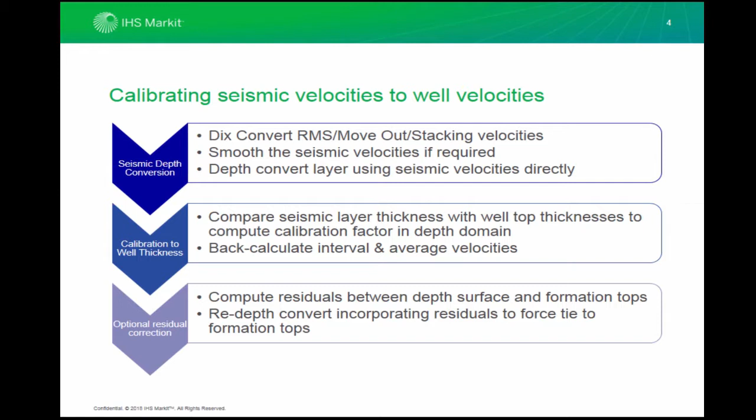So let's have a look at the project we will be using in VelPAK before we go into the wizard. The project already has data selected for the model. We have a time grid here displayed on the surface module for layer 1, and these data are shown in the model tree to the left against each of the events.

If we open up the surface part of the model tree, you can see the time grid stored under event 1. Also within this model tree you can see that we have the 3 wells displayed.

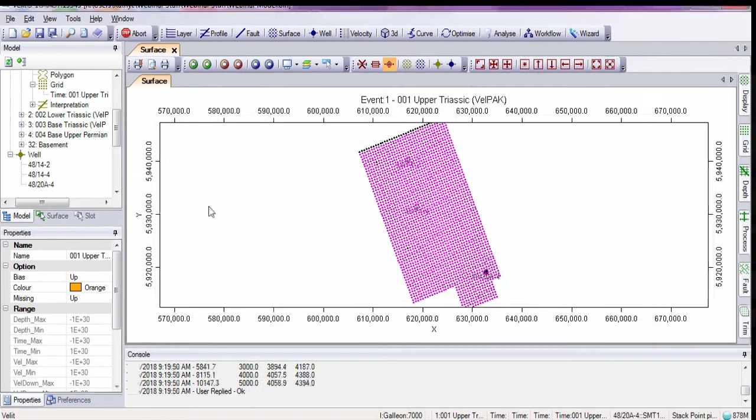On the surface display, if we change the display to basic rather than showing the shaded contours, we can see the wells more clearly. The pink dots display where the stacking velocities are over the area. And if I bring up the velocity module, we can see the RMS stacking velocities and corresponding average velocities ready to be calibrated.

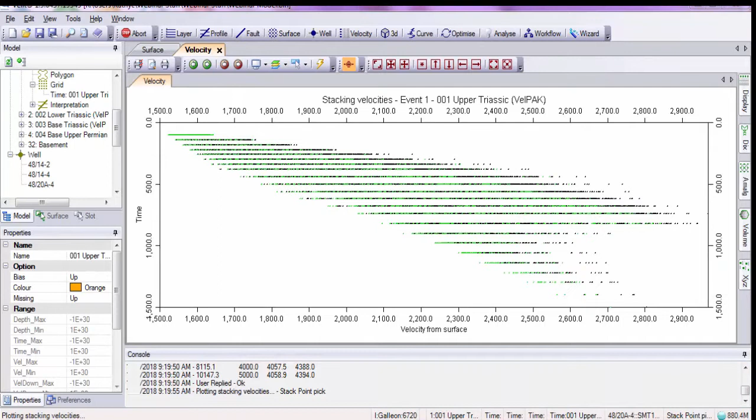Now if you bring up the well module, we can see one of the 3 wells displayed here in depth. The layer definition for the well has been done as part of the data selection procedure via the link. The layer definition selection of tops relates the seismic pick to the geological top to associate the well formation top depth layers with the time grid layers. For every layer in the model that you have a time grid surface, a top is associated with it.

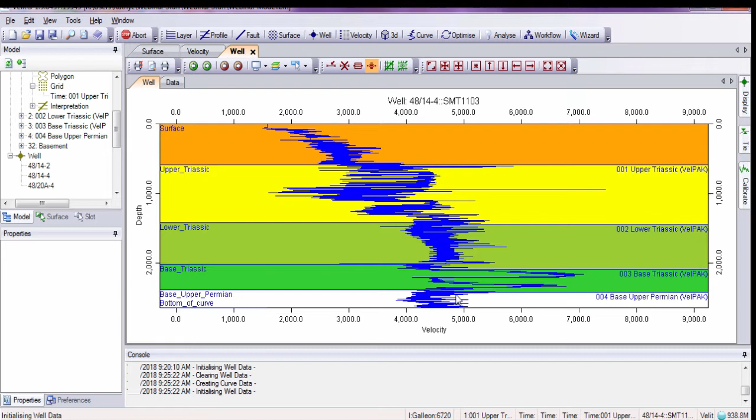The formation top denoting this layer is plotted on the left of the well display, for example Upper Triassic, and the corresponding seismic surface is displayed on the right of the log. So we can see at a glance that the grids correspond to the layer definition, or you may be able to see that within the 3rd layer here there is a slight discrepancy which we may have to look into later. So we have 3 wells, we have stacking velocities in the project, and we have time grids, so we are all set to go into the wizard.

The wizard module allows you to complete often repetitive tasks quickly and efficiently for any given event in the model. The wizard screen starts with the help screen open at the bottom. Every wizard option has a comprehensive help within the window. In order for us to see exactly what is going on within VelPAK while we are running the wizard, I'm going to open various windows and dock them alongside the wizard.

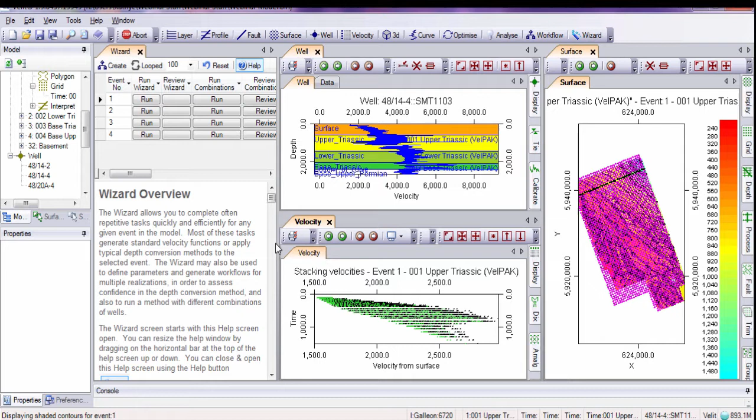Like so, we can now see the wizard, the well module, the velocity module and the surface module all at once. Before we start a depth conversion, we want to compare our seismic velocities with the real well curves we have in the project. We can look at pseudo wells that are generated at the real well locations, and if necessary run the Dix calibration factor on the seismic velocities to match at the wells.

So if we press Run next to event 1 in the wizard, we will be presented with the options to work with and to choose from. The first screen is to select the method of depth conversion to use for the first layer, in this case seismic velocities. The wizard moves to the data verification page where it runs a check to make sure the data required for the particular process is available in the project.

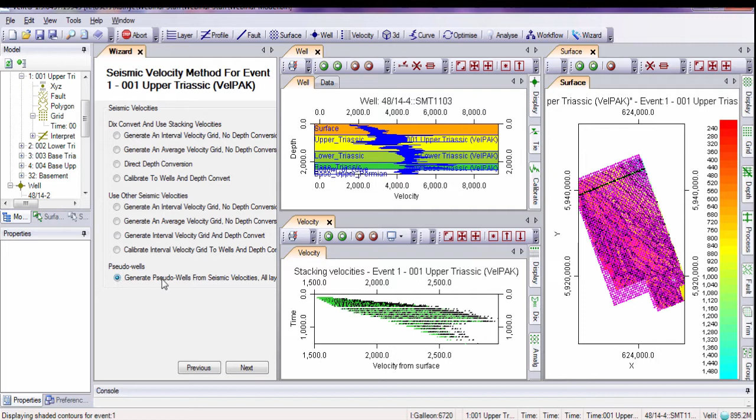Press Next through this and we need to select the seismic velocity method we will be using. Here is a long list of depth conversion methods that use seismic velocities. In this case, however, to start with we are going to use the final option, generate pseudo wells from the seismic velocities. Note that the wizard here is acting as a utility to do as it says and is not actually going to depth convert anything.

So I select pseudo wells and the pseudo wells screen comes up where you can generate a set of pseudo wells over a survey location area or as a regular spaced array, and in our case at the real well locations. As I said, by comparing these with the true well velocity curve, we can see how useful seismic velocities might be, either holistically or per layer.

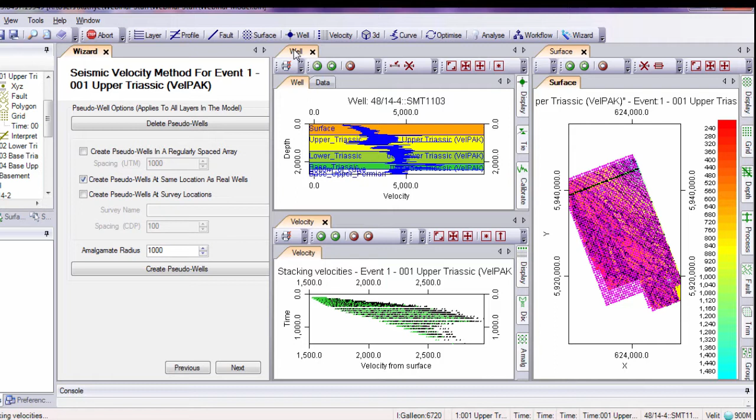Now this part of the workflow within the wizard works in conjunction with viewing the velocity module, so we must make sure the velocity module is on display. I'll make it a bit larger here. In the velocity module, the stacking velocities are shown in green, along with the average velocities that have been calculated via the Dix equation, as shown in black. You can already see that the average velocities do not lie directly on the green RMS velocities, so we may well have to apply a further calibration.

There may or may not be a calibration factor required to apply to the generated velocities to calibrate them to the real well traces. This is what we will be doing next.

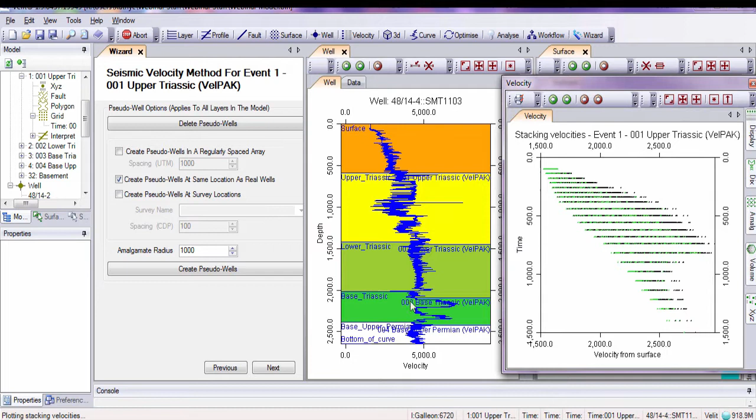So back into the wizard, we select Create Pseudo Wells at the same location as the real wells and press Create Pseudo Wells. And you can see that a pseudo well has been generated and laid on top of the well within the well module. A default percentage of 92% is used to start to produce a pseudo well at the well.

Here you can see that for well 48.14.2 in view now, this scaling factor looks too high, since the stack wells look a little faster than the real well trace. So we can change the factor for event 1 to be, say, 90%. So if we go into the velocity module and set up the Dix flyout for event 1, return it to 90%.

Press apply and then create the pseudo wells, and keep an eye on the pseudo well trace here when I press create pseudo wells. So that has moved the pseudo well to be more in line with the general trend for event 1. It's not going to be perfect. For layer 2 it looks like the pseudo well is slightly too slow for the real well, and certainly for layer 3 the pseudo wells are too slow.

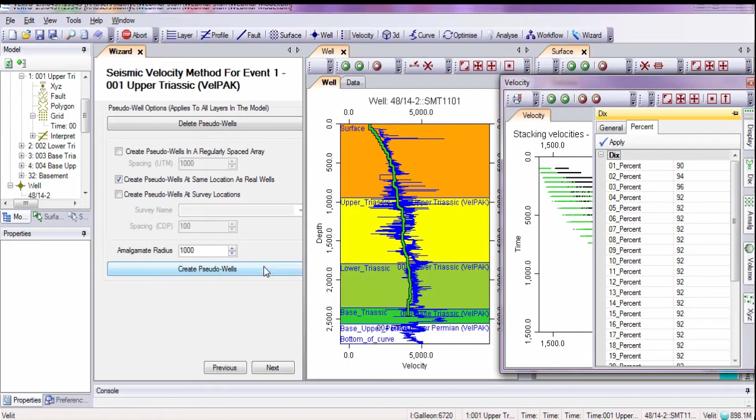So we'll need to change the Dix calibration to, say, 94, and let's try 96 for layer 3. Pressing the apply and create pseudo well. Again, keep an eye on the well and see what effect that has.

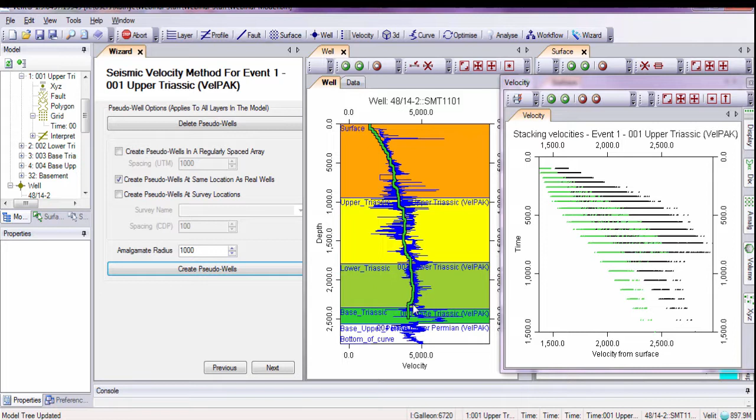Layer 4, we're not doing a depth conversion in layer 4 today, but it is dragging in the velocity at the bottom of layer 3. So if I change that to also be 96, press apply, create the pseudo well, hopefully that will bring it out a bit. Okay, we'll leave it at that for now.

And if we move through the other wells in the project, hopefully they'll look much the same. Yeah, they're okay. Note in the model tree that the 3 pseudo curves have been added as wells into the tree, with the name of the real well preceded by the word stack. So we have applied a calibration factor to the RMS velocities to try and tie them to the real wells, and we can now start depth converting.

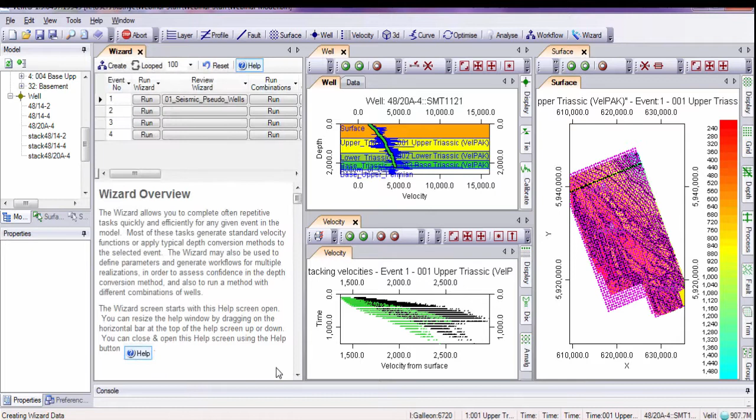We will move through the wizard setup until we return to the wizard launch page by pressing next. And then when we press run again next to event 1 in the wizard, we will be presented with the options to work with and choose from. Again, we choose seismic velocities and move through the data verification page. And we need to select the seismic velocity method we will be using to depth convert. In this model, the stacking velocities are loaded, so the first 4 options could apply.

I wanted to use the calibrate to wells and depth convert method, so I select that. In this method, a depth conversion is made by using interval velocities derived from the RMS stacking velocities. The isopach of the depth converted layer is determined at each well location and compared to the well layer thickness based on the formation tops.

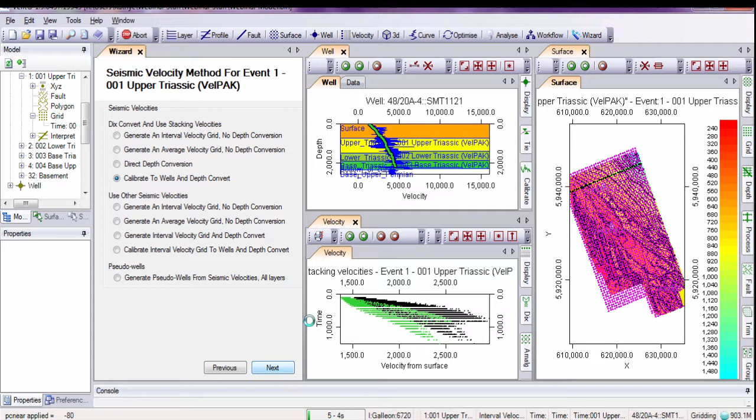A single scaling factor is determined interactively, and the interval velocity is then recomputed to best tie the wells. The calibrated interval velocity is used to re-depth convert the event. So I select that and press next. Now the seismic velocity grid is being generated. We are taken to the smoothing screen, which allows us to smooth the seismic interval velocity grid if necessary.

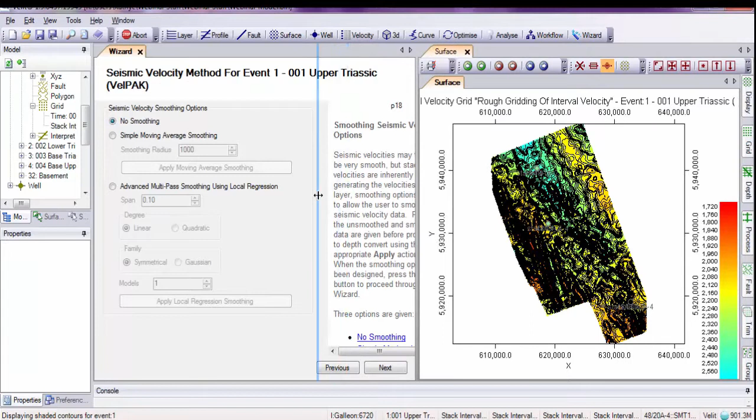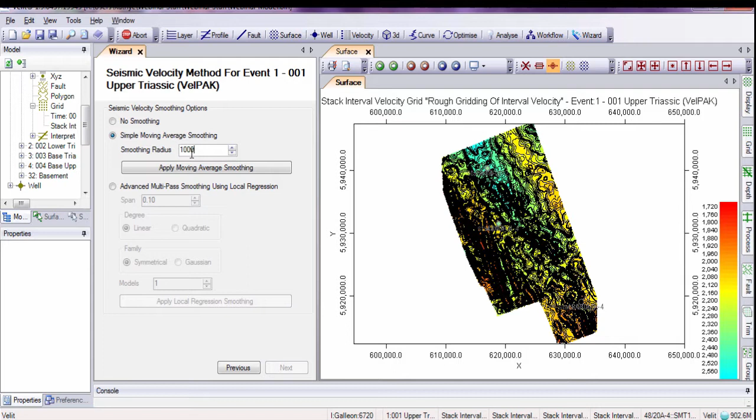The unsmoothed seismic velocity surface is shown in the surface display and looks very noisy to me, with no apparent trend. There are 2 smoothing options that are given: a simple and fast moving average, or the more advanced multi-pass local regression option. For example, we can try both, starting with the simple moving average. I'll set a radius of, say, 5,000 meters for the moving average smooth, then press the apply button.

We can see the smoothed velocity grid in the surface display. It is a lot smoother, but it can be smoother still, using the more advanced process of the local regression smoothing. This method, known as LOESS for short, attempts to perform regression on noisy data, removing outliers from the data on multiple iterations. As such, it can give good results, though it is computer intensive and may take a few minutes to run.

There are a few more parameters for this smoother, which we can adjust and see the changes. The help screen describes these parameters, though the most sensitive is the span value. I'll use the defaults and press apply.

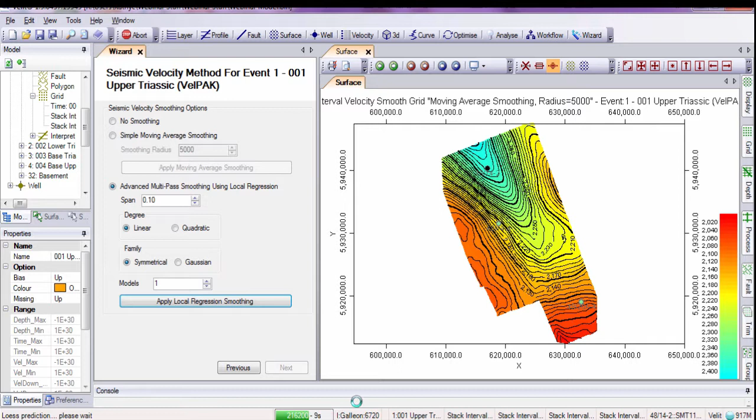The smoothing takes longer than the moving average, and the large surveys can take some time. We can see the progress and estimated time remaining in the progress bar at the bottom of the screen. However, we end up with a result that is more closely resembling the input but smoothed.

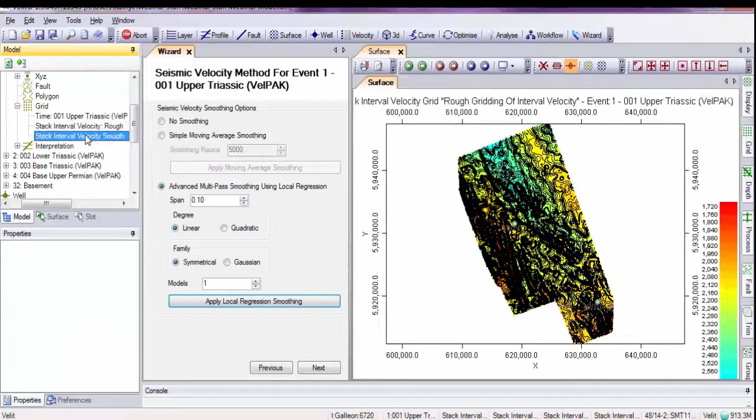We can review the input data, which is stored in the model tree as stack interval velocity grid rough gridding of IV here. I can then redisplay the smoothed grid from the stack interval velocity smooth grid slot in the model tree to see the changes.

I can tweak the local regression parameters should I need to, then regenerate the smoothed grid until I'm happy. But I'm fairly happy with the grid that I've got. Once you have designed a smooth velocity grid, we can press Next to move through the wizard. The curve display briefly flashes up and some processing is done. The wizard prompts us to apply the calibration factor. We can see what that is by looking at the curve display.

The x-axis of the plot shows us depth, but that's not particularly interesting unless we have any outliers in the x direction. The y-axis gives us the calibration factor, that is, how much the seismic isopach needs to be scaled to the well isopach at each well location. So obviously 1 point per well.

The mean of these scaling factors is computed as the horizontal line. The value of this is posted as the A0 value in the bottom right-hand corner of the display, along with the standard deviation of the samples. As with any other display, we can deselect and reselect individual wells by clicking on them. The mean value is dynamically recomputed. Just be sure that the selection is correct when you press the Apply Calibration Factor button in the wizard.

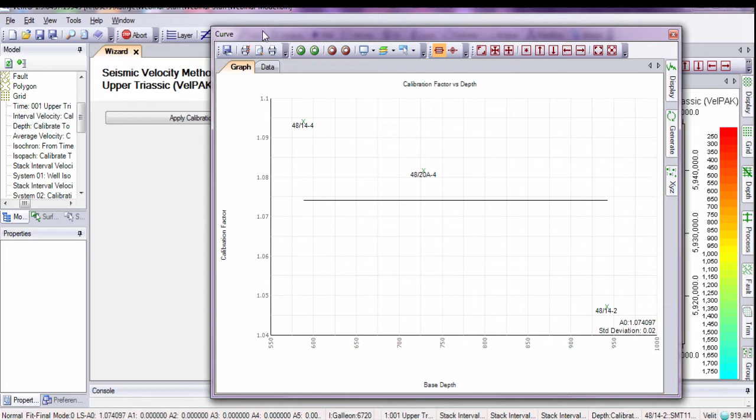The calibration factor is typically around 1. If values are much away from 1, check the units of the velocity and well data carefully. Note that this factor isn't directly comparable to a typical 5 to 15% reduction used for Dix conversion scaling, but it should be in a similar magnitude.

When you press the Apply button, a preview of the depth converted grid is shown in the surface map. If the depth values look sensible, and they should, press Next on the wizard to move on to the usual residual error correction dialog. Because we have computed an average calibration factor for all these wells, there will still be misties for all the wells, and these are shown on the map here. It is better to calibrate to the mean, then apply localized corrections, than apply a regional grid that forces a tie but doesn't give any indication to problem data.

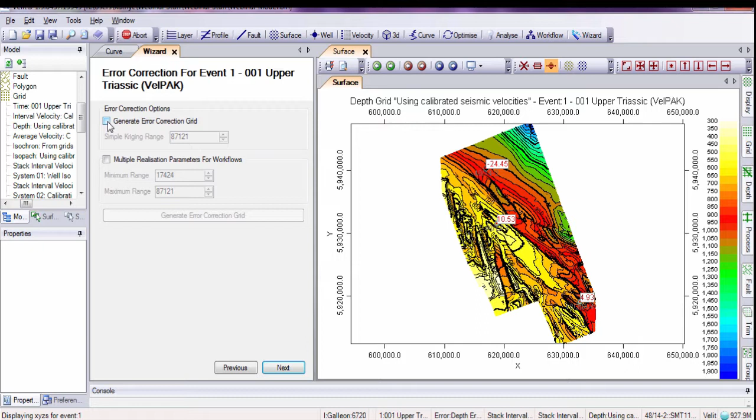So I'm going to just make localized corrections with a radius of 2000 meters of each well, so I specify the radius as 2000 and press the Generate button. I can adjust the radius as I see fit and press Generate again. When I'm happy with the correction grid, I press Next to re-depth convert, incorporating it. The wizard then comes to the Finish page after back calculating the velocity grids and the depth grid that tie with the well tops. You can see that the error is now greatly reduced.

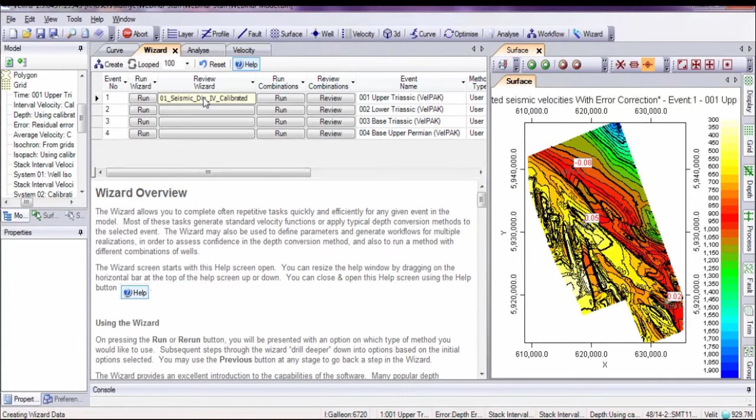The final page of it for layer 1 here tells us it is finished and has named the setup we have just done, so we can see at a glance exactly what process we have done. There is also a space for your own comments about the setup here. Pressing Next again returns to the Launch page, and you can see that name appears in the Launch page under layer 1. All the grids that have been generated, including the velocity grids, are stored in the model tree as expected and can be displayed by clicking on them.

So moving on to layer 2, this time we are going to use a seismic velocity process again, but a different one to the previous layer. So select seismic velocities and go through the verification page. This time we are going to generate an interval velocity grid, but not do a depth conversion yet on the layer. So we select under the Dix convert and use stacking velocities, generate an interval velocity grid, no depth conversion.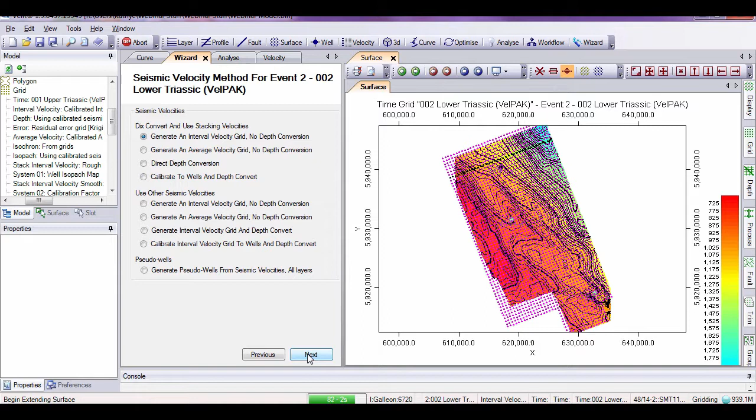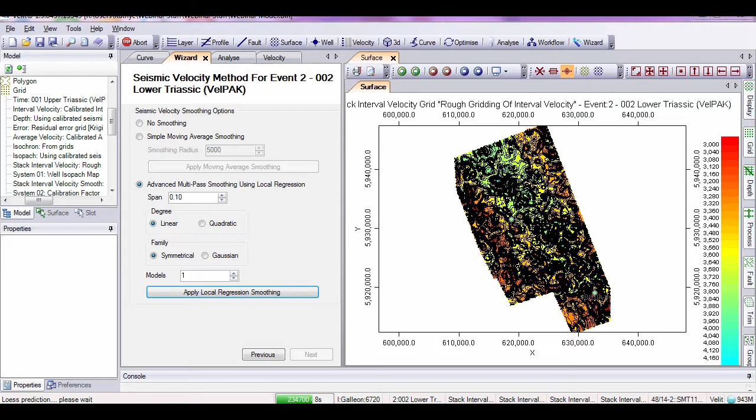Again, the process is making a rough grid of interval velocities. This bit is similar to the process we did in layer 1, but this time for layer 2, as defined by the layer definition shown in the well display. The smoothing page comes up, so we can immediately go to the LOESS smooth and get a smooth interval velocity grid. Once the smoothing is done, however, we move away from the method we used on layer 1 and move through the wizard back to the main wizard launch page.

So far for layer 2 we have just generated a smooth velocity grid, and we're going to use that as an external drift grid along with the real well information that we have. So if we go back into the run for layer 2, and this time select mapping as the method.

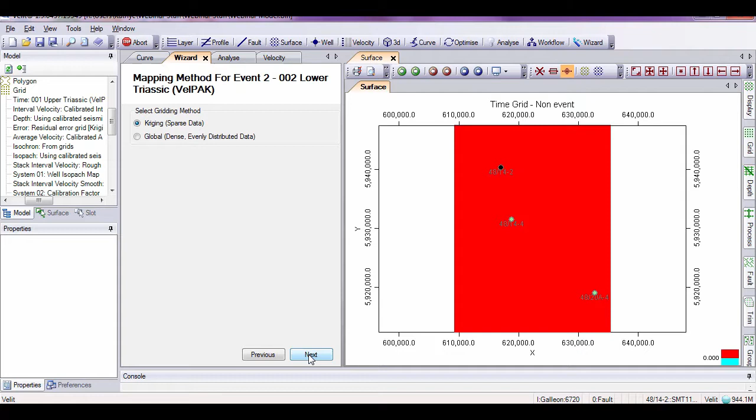Press next and next again and select well vertical apparent interval velocities as the method for your mapping. Since we only have sparse well data, we will select the Kriging gridding method for our wells. The information has calculated a number of things, including an interval velocity grid using just the well information.

But what do we do with this? Well, we can use the stacking interval velocity smooth grid that we've just generated from Dix conversion. We can use this as the drift grid, enabling much more control over areas where the well information does not exist. So essentially we're going to merge the two grids that we've just generated for layer 2 together.

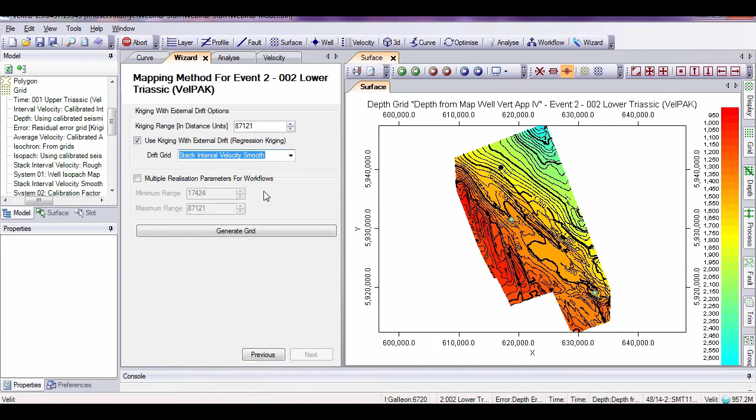Check the external drift box and be sure to select the correct smooth velocity grid from the list. The grid is generated and the depth grid for layer 2 is produced. As you see, there's very little error, as you'd expect at the wells, since we have used so much control at the wells already. We will now move on to layer 3.

We are going to use an optimization method for layer 3, which allows us to determine the depth conversion parameters from well curve or layer information using numerical optimization. These are processes based on the Al-Chalabi methods of trying to deduce the best V0 and K from the given parameters.

Optimize uses nonlinear least squares curve fitting of time depth curve data derived from a range of sources, sonic logs, check shots or tops and times, to derive the best function parameters for each well. It has the facility for allowing one parameter to be fixed and the other mapped, for example fixed K and contoured V0. With close interaction between the parameter grid and the mapping modules, you can immediately see the V0 and K values that best suit your data.

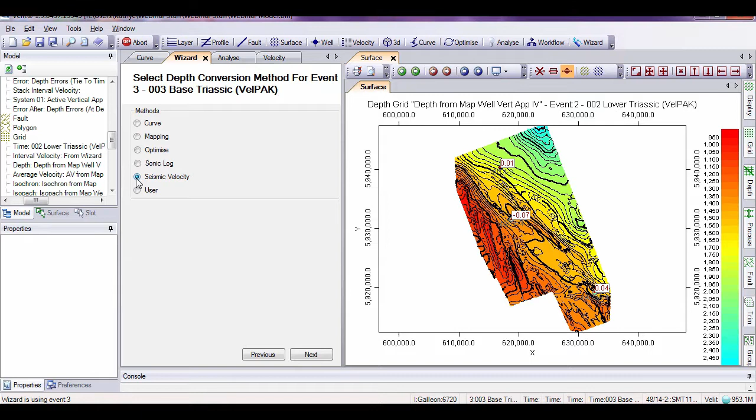So we can make an array of pseudo wells over the entire survey area and then use this information in the fitting to time depth curves method. So firstly for layer 3 we are going to create the pseudo wells for seismic stacking velocities. So press seismic velocity, again select the generate pseudo well option at the bottom.

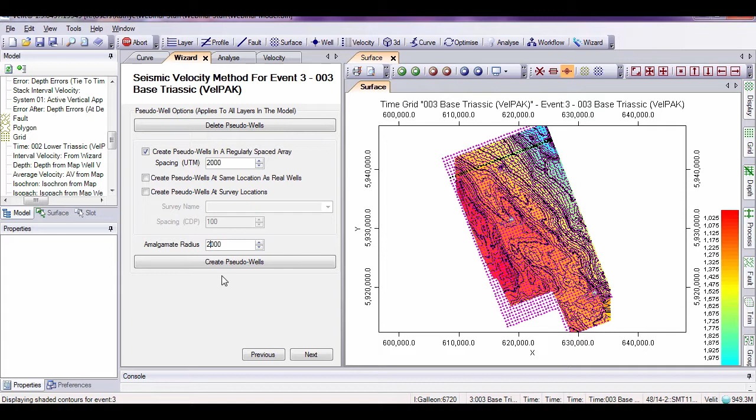So now we know that the calibration is correct for the wells, we can run a regularly spaced array or grid of pseudo wells using a spacing of 2000 across the area and an amalg radius also of 2000. This is the radius around each pseudo well that the process will gather the information to produce that pseudo curve.

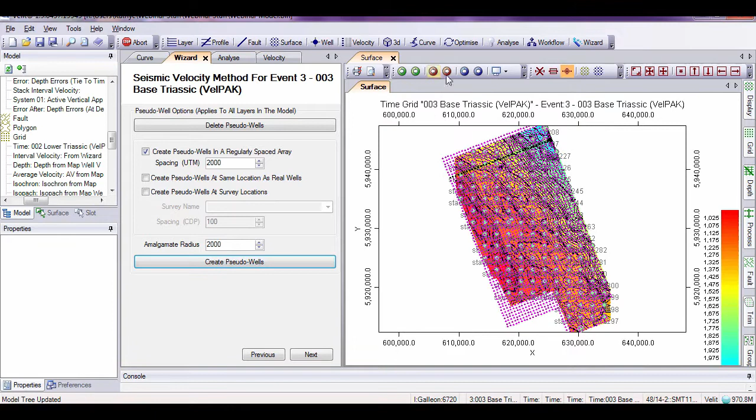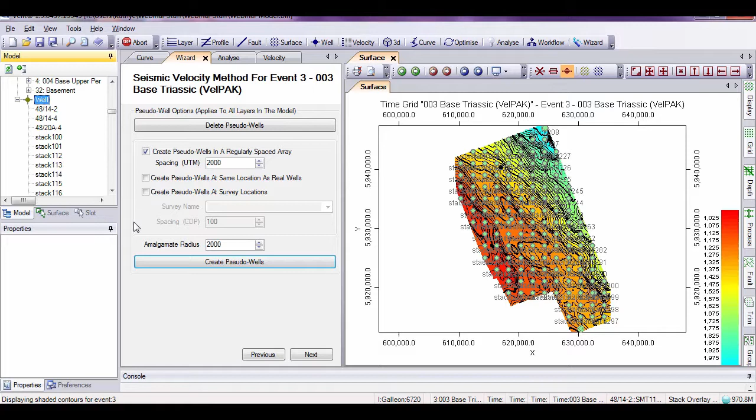So when the process is finished, once you've pressed the button, you can see the grid of wells on the map. And again note that the pseudo wells are in the model tree. We can use these pseudo wells in various methods of depth conversion, but in this case we are going to use them in the optimize.

So we move forward, pressing next to go back to the launch screen and press run on the layer 3 again. This time select optimize. Moving on, we get to the optimize method for event 3, so select the function to be optimized from the seismic datum and the optimization method to be fit to well curves.

Press next and we come to the optimize parameter space page. Here the program has attempted to calculate the optimized parameter space, which is the range of V0s and Ks to examine, but the ranges can be modified here. After the Run Optimize action button has been pushed, you may interact with the Optimize module display to select and deselect wells or zoom in and out of the parameter space. So here we press Run Optimize and the optimization will begin.

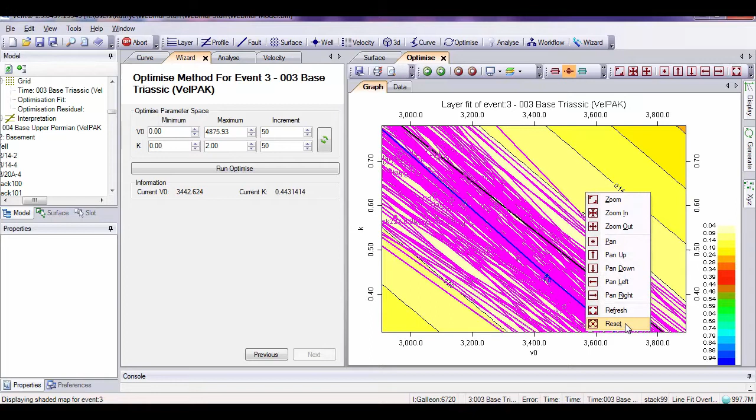When the Optimize has completed, we can go into the Optimize module and have a look at the display it has generated. It looks a bit busy, but zooming in we can see that the pink are lines and each one represents the fit of a well for the layer. We can turn these line fits off to make the screen display a bit clearer. Now each point that you can see there refers to the best point fit of each well.

Given the depth conversion parameters entered in the process, a grid is generated for each well in the model. The generation takes each pair of V0 and K values and works out the depth value, comparing it to the time depth curve data for that layer for that well.

The value plotted is the difference between those two values, and as the values of V0 and K become more true, the grid values will reach a low or trough, and contouring these values will therefore show where the best values of V0 and K will be. You can see the trough in the center of this optimized module display here. The optimum V0 and K is shown within this trough as a fit point, in this case with a value of V0 approximately 3500 and a K of approximately 0.4.

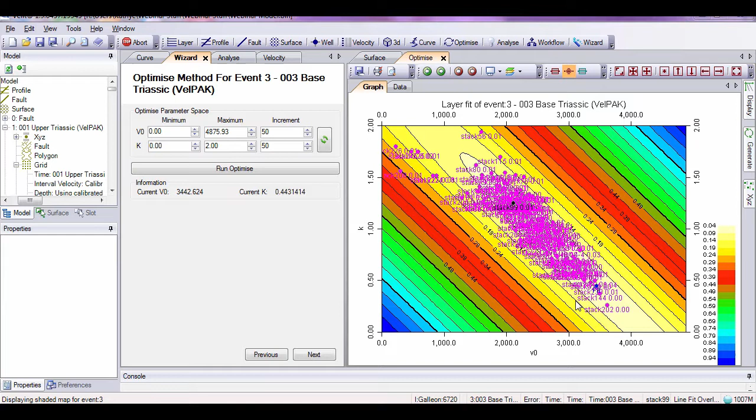As you can see, these are the derived V0 and K on the wizard page. Now the optimizer has been generated, moving forward allows us to select what we want to do with these values. In this case we can use a fixed K and contour V0 method, which means for each well the V0 value corresponding to a fixed K is found from the optimization results and stored in the XYZ slot of VelPAK.

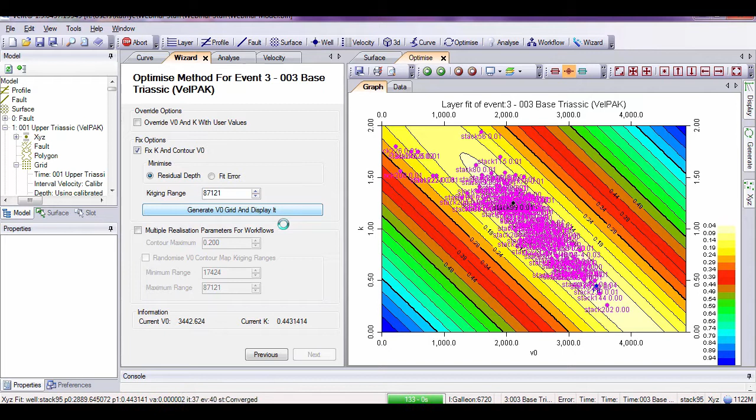A depth conversion intercept grid from these values using kriging is then produced. This introduces space variance into the model that is not present with the simple linear function V0K and is a good tool for predicting results away from the survey area. So I'll press Generate the V0 grid and display it. Pressing Next will do the depth conversion and we will have our depth layer for layer 3.

So that concludes the depth conversion of the 3 layers using sparse data within VelPAK. We have the 3 depth grids that you can see in the model, and you can look at them in the surface module, but you can also view the grids in the 3D viewer within VelPAK. And of course these grids can be moved back into Kingdom along with the TD curves generated.

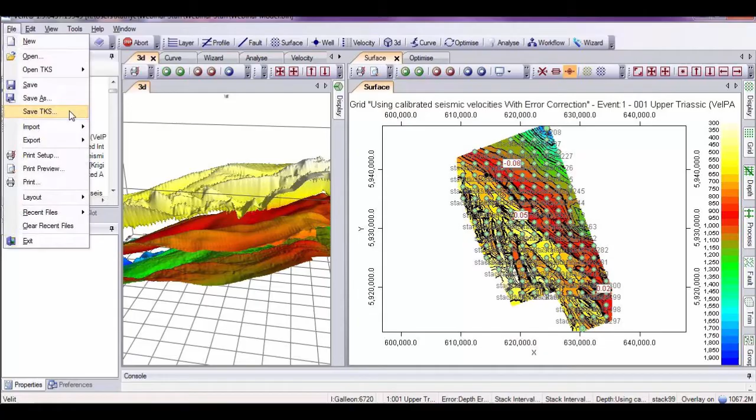Okay, we will now move on to the second part of the webinar where I will briefly run through the VelPAK capabilities with regard to onshore complex structural traps where data is limited to 2D. I made a recording of these capabilities a couple of weeks ago, so I'm going to run this recording of the techniques available within VelPAK. However, note that the recording refers to our sister product Velit, which is exactly the same as VelPAK but available via Schlumberger on the Petrel platform.

In this demonstration I'll be showing how to snap test sections within Velit and demonstrating some of the snapping features. Sometimes the geological structure cannot be easily represented by grids, which is why we use the snapping technique on 2D data instead when you have things like reverse faulted regions, salt intrusions, pods and channels. So in this case we use the profile mode depth conversion to work with the data, but before you can do the 2D depth conversion you have to go through the process of profile snapping.

Data from the workstation basically consists of segment-orientated data, a collection of digitized sequential data points measured by shot point and two-way time. These points are collected into segments until there is a break in the data, which is usually caused by a fault, for example. Snapping is the semi-automatic process that attempts to connect and integrate these discrete segment-orientated data into a meaningful geological layer. Once snapped, velocities can be applied per layer and the profile then depth converted.

Okay, so I'm going to try and do this in real time on this first section, which shows a fairly complex section with an overhanging salt dome and various segments that have not been continuously picked for some reason. If I press snap up here, the process has already read through and processed every event and has found that the bottom layer has missing joins, so it's asking us if we want to auto segment merge this rather than us having to make manual merge options. So we say OK, and it's done it.

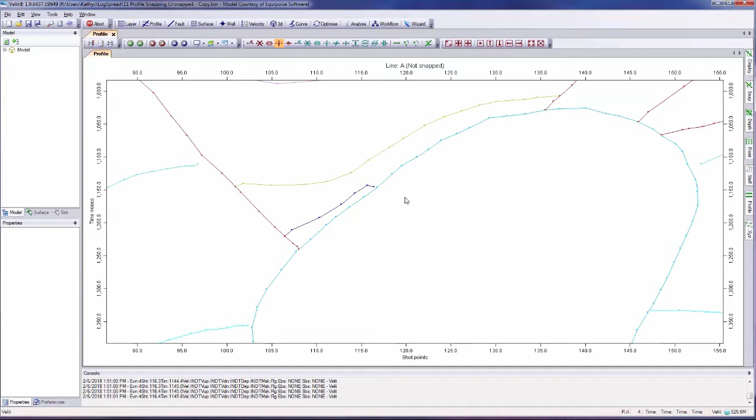OK. This is another procedure. I'll just press OK and zoom in, and then you can see what's going on. Now this event should be pierced by the salt dome, but the process can't extrapolate into the salt dome. It takes an extrapolation which would be taking us straight up there. So I'll use one of the processes here to move a point, just slightly tweak it to go down into the salt dome so that when it tracks along it'll extrapolate into the salt dome and know that it's been pierced.

Now if I reset and press snap again, you can see the process is tracking along each event, making a continuous layer for each event. Now it looked like it had finished, but it hasn't, because one of these events hasn't been picked on the left hand side of the fault here. So it's saying it cannot get back to the minimum shot point.

So here, I just press OK, we're going to have to insert just a small amount of this event, which will take us up to the end of the section. So I need to pick the correct event. So it's event 6. Then I use segment insert, and I can just draw in that small portion of line.

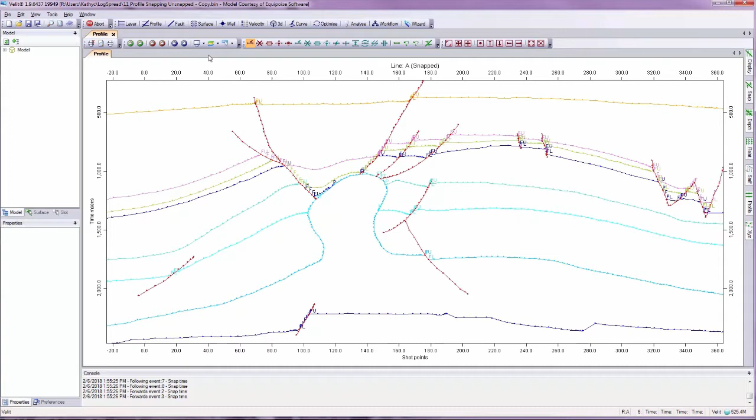So if I reset, and now if I press snap, you see the entire section will be made up of continuous layers going across. And that's it, it's snapped, it's got fault uppers and fault lowers marked against where the events have gone up and tracked down faults.

If I ask for a time fill of the section, we can see that each layer is continuous across the profile, and the colours of the layers correspond to what velocities will be assigned to that layer, which, if the layer is continuous across the profile, may be obvious, but in and around events where the events dip in and out of faults, and around the salt dome for example, it acts as an important QC to be sure the velocities are trapped in the correct layers.

Now I'm just going to change the colour of one of those layers, because we've got two blues there, so if we just go and change the top thin blue to yellow, you can see clearer that it's a separate layer, although continuous over the profile, tracking down the faults.

Well, that concludes the demonstration of snapping in Velit. It's clearly not something to be done on a 3D survey, and it can be quite time consuming, but I hope I've demonstrated that complex geological situations can be snapped in a way that a depth conversion can be run on the data. And it's fair to say that once proficient, you can find yourself picking the events and faults in the seismic workstation in a slightly different way before moving across to Velit, so that the snapping routines will work quicker for you once in Velit.

Okay, now we will move on to the third part of the webinar, which is to look at the HiDef module and a brief overview of the theory behind it. So, HiDef can be used to scale processing velocities within a geologically constrained model and create hybrid models for layers where processing velocities may be less reliable.

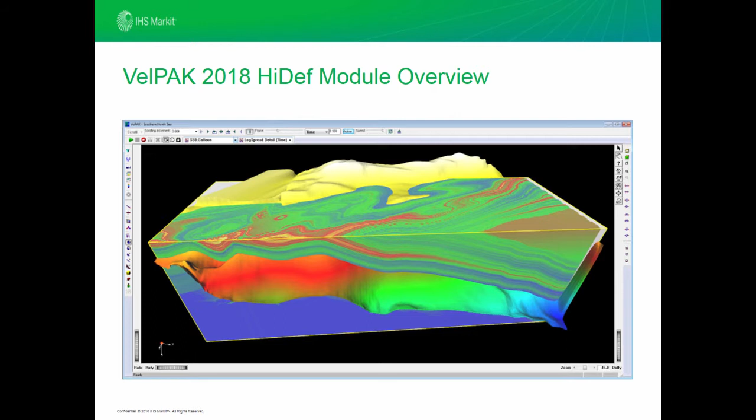One common feature required of depth conversion velocity volumes is to add more detail so the volume may be used for a greater variety of uses, from better depth conversion between wells to providing a background geological model for seismic inversion, reservoir characterization, or bright or dim spot studies, for example. The HiDef tool takes a background model and adds the character of the sonic logs to that volume in a geological and geophysically consistent way.

So the resultant velocity volume will still be accurate for depth conversions, tie the wells and retain the velocity gradient in the low frequencies of the volume, but with log scale detail. So it doesn't simply spread log velocity data between wells, but it uses the velocity trend in the input volume to propagate well velocities in a geophysically meaningful fashion.

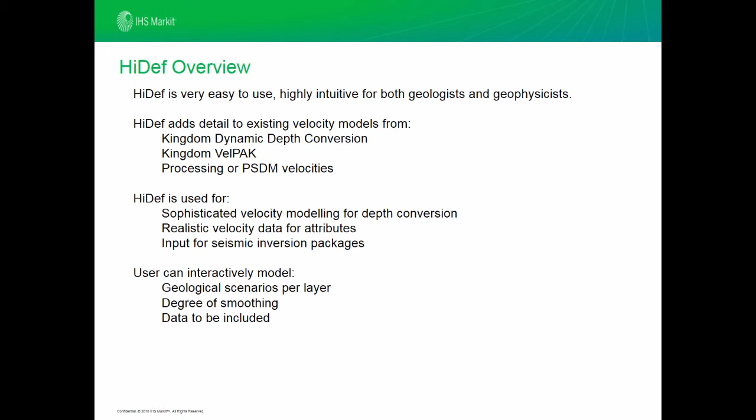The geological constraints can be provided either in the tool or by importing an external geological model. Input velocity volumes may come from Kingdom dynamic depth conversion volumes, VelPAK velocity volumes, or any external SEG-Y velocity volume. The tool is easy to use and is highly intuitive for both geologists and geophysicists.

HiDef uses kriging to distribute sample values from the sonic logs between layers, taking into account the background trend from the supplied velocity model and the geological layering defined in each layer. The detailed velocities are used to depth convert each layer and a residual correction computed to ensure the velocities tie the formation tops at the wells.

If data are unavailable over an area, it will blend the volume with the existing volume, and wells and layers can be individually selected and controlled. The residual error correction is then applied to the velocities using the same method as the initial distribution of sonic velocities to ensure a self-consistent volume.

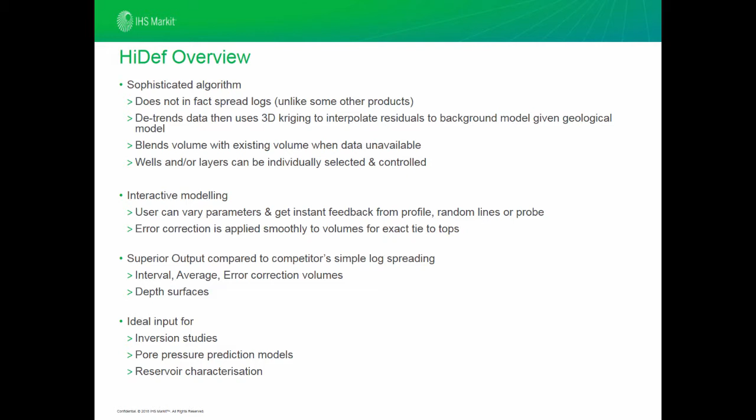So, it provides a better volume for the depth conversion and is an ideal input for inversion studies, pore pressure prediction models, and reservoir characterization. Both these profile displays are from HiDef.

As you can see from the traditional model in the top display, the standard velocity volume being displayed does not conform to the well information. Zooming into an area, you can see the well trace more clearly and that the velocity volume does not conform to the well information. Within HiDef, for each layer, the well velocity log data is detrended.

For each log sample in the layer for each well, 3D kriging is used to propagate residual scalars using the background model trend, applying structural constraints defined for each layer in the geological model. Again, zooming in, you can see the velocity conforms much better with the well information.

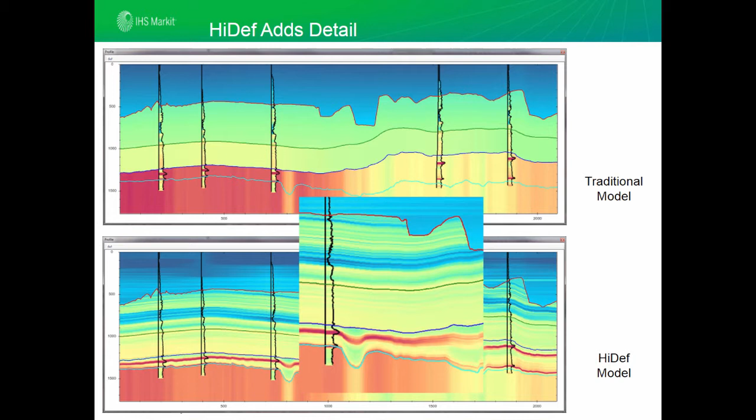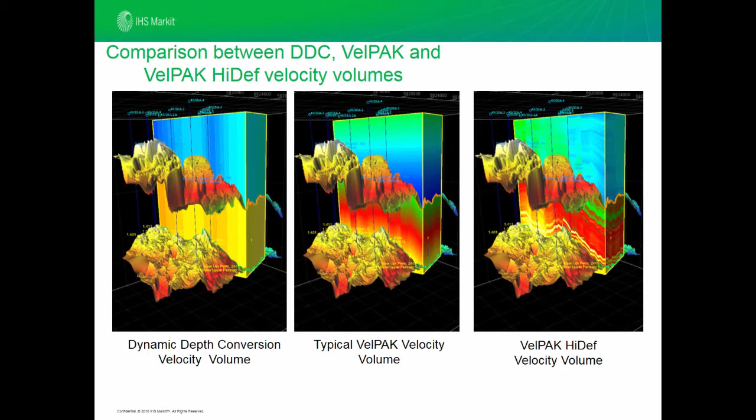Just before we go in to look at how the program works, this slide shows comparative displays from within Kingdom between a dynamic depth conversion volume, a VelPAK velocity volume, and the more detailed velocity volume generated in HiDef. So let's move on to actually looking at the HiDef program.

Here is a standard VelPAK screen. HiDef is accessed from the Tools drop-down from the top menu. Now we need to select the background model that we're going to be using, and HiDef will come up. The display starts with the surface map, similar to what you would see in VelPAK.

Over to the left are 2 trees. One shows what is within the HiDef program. Initially it will come up with the wells from VelPAK, and under seismic trace you'll see the background velocity SEG-Y volume that has been read in.

The model tree shows what data are available from the VelPAK project within the current HiDef project. For example, under each layer there are surface grids from the VelPAK project stored, which you can use later to do a depth conversion within HiDef.

If we press the Well tab, we can see the HiDef display given the wells and the background velocity model loaded. The first well that is displayed is well 48/14-2. These background colours you see are set randomly and denote the layers as defined from the VelPAK layer definition at that well.

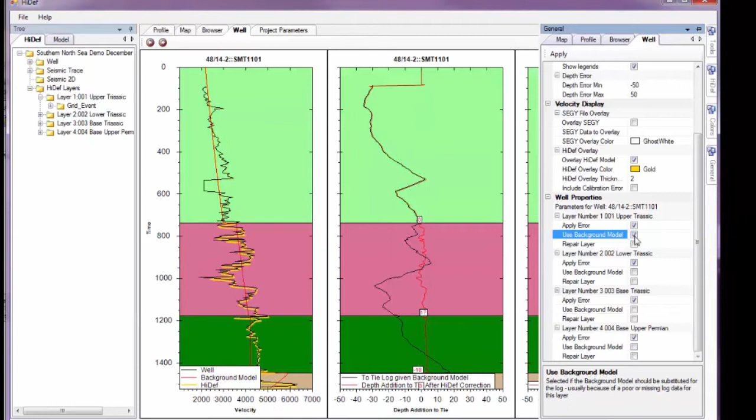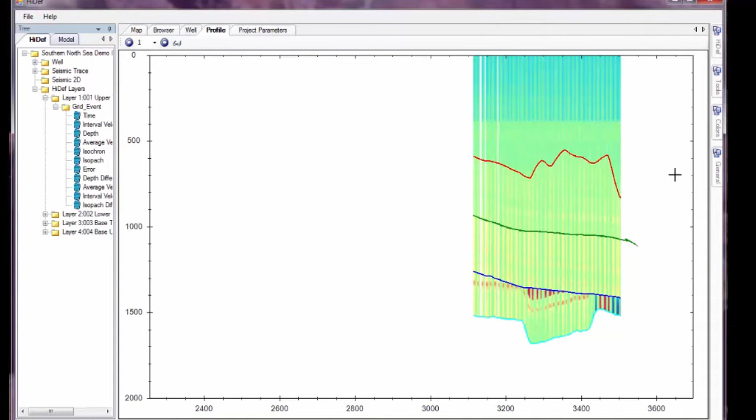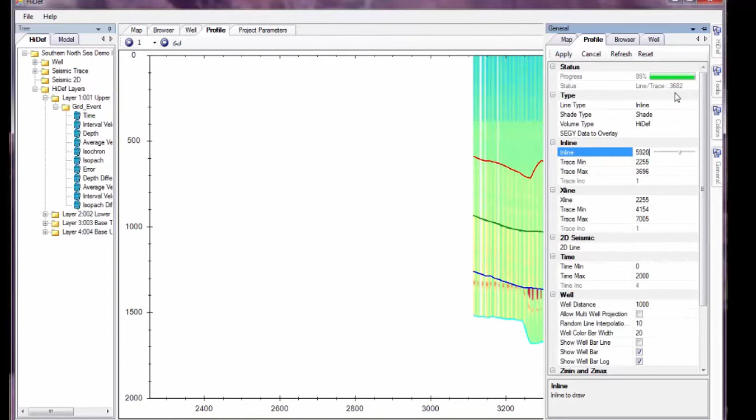Now let's look at the data as a profile by going into the Profile tab. 2D lines, 3D inlines, crosslines and random or arbitrary lines are supported as profiles. Let's display an inline that goes through a well within the model. Select the inline you want to display by going into the General Profile flyout. I'm going to select inline 5920. Pressing apply, a slice of the HiDef volume is being generated for the selected inline.

So here you see the profile display and the two well logs that are near to the profile. Zooming in on the area of the profile near the wells, you can see that these tracks are showing the velocity well trace. The width of the colour bar associated with the well trace velocity is emphasised to make it visually clearer. Hovering over the well trace, it says how many metres away from this profile the well trace actually is. I don't know if you can read that, but it says 200 metres away.

If we briefly go back to the map display and zoom in, the green line shows where inline 5920 is, and its proximity to the two wells that have traces that are on the profile display.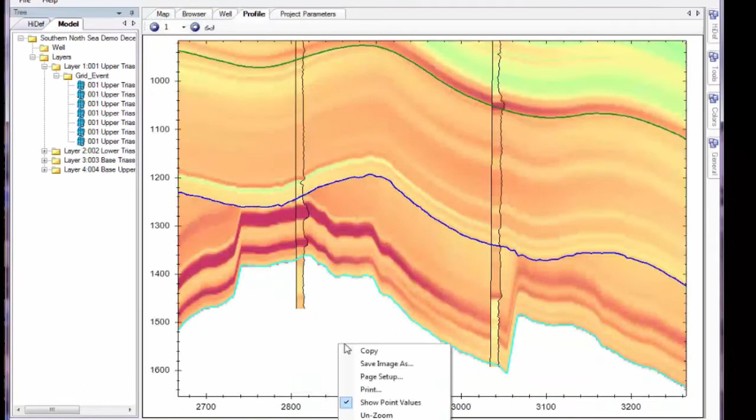Here you see that the high velocities shown in the wells in the last layer have been propagated through the layer, keeping the propagation parallel to the base. This means that this layer has been set within the HiDef tab as cut from top, as discussed in the presentation earlier. Now, to emphasize what HiDef is doing, in the flyout we will change the volume type option to the background velocity.

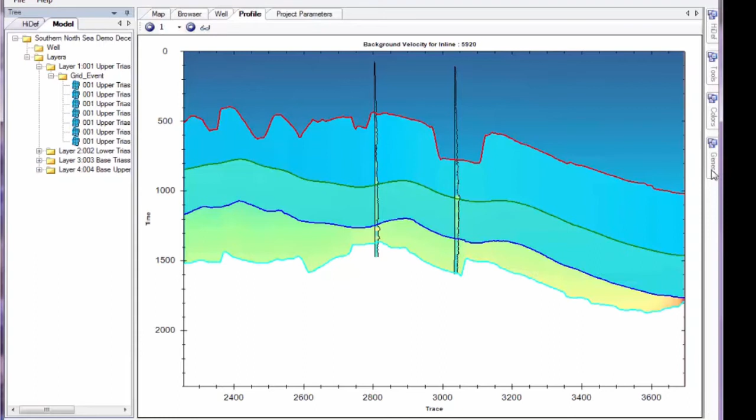So this will display the background velocity that was used within VelPAK to do a depth conversion. As you can see, the detail within the volume that HiDef produces is now missing. Another useful tool is from the general flyout to select the difference volume type. This will give you the difference between the background velocity and the HiDef velocity.

Opening the colour table, and presenting it next to the profile, you can see that in the last layer there are differences between the velocities of plus or minus 1000 meters per second or more.

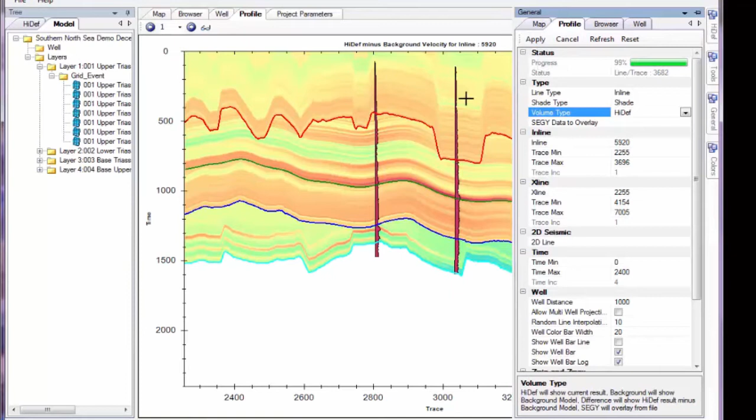If we have a quick look at the well panel for this well, 4814.4, for the bottom layer you would expect to see the same discrepancy between the background velocity model and the real trace and the HiDef volume. Going back to the profile, and turning it back into the HiDef volume, you can see how much closer the volume conforms to the well.

Now let's take a more detailed look at the geological model parameters grouped and defined by each layer under the HiDef spread parameters. Each layer has a kriging range distance parameter and a spread type. The kriging range is the distance that the log propagation occurs. It defaults to cover the entire grid area, but this can be adjusted for specific layers.

Looking at the spread type, you can see the three that have been mentioned before: cut from top, cut from base, and stretch and squeeze. And as we have already seen, we have the additional option of just selecting to use the background velocity model for any particular layer. Changing the layer spread type values randomly, then pressing apply, you can see instantly the changes the spread type makes to the HiDef volume.

Here, for example, the base layer has been changed to be cut from base, which means the velocities will now run parallel to the top of the layer. It must be emphasized again here that geological knowledge is required to get these parameters correct for the layers in your own model. For more complex geological scenarios, such as reverse or complex faulting, it is worth mentioning at this point an external geological model can be imported from third-party software, such as Eliis Software's PaleoScan, and HiDef will propagate log velocities using that.

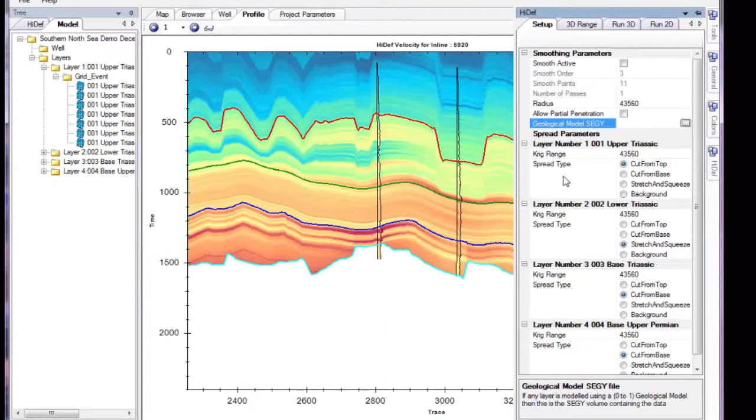If we go back to the map module, it is possible to draw a random line going through a number of wells by selecting the toggle button here and then clicking over the wells. A random line is being made, joining up through all the wells. Now if we go to the general flyout, the profile tab, select the line type as random and apply, a random profile slice is being processed, which we can look at in the profile mode when it is finished.

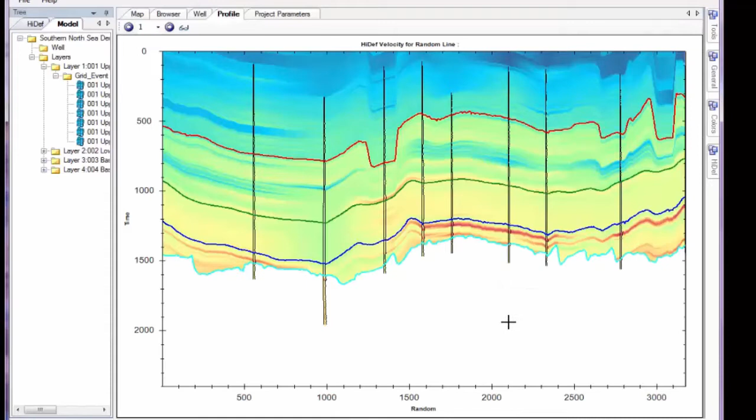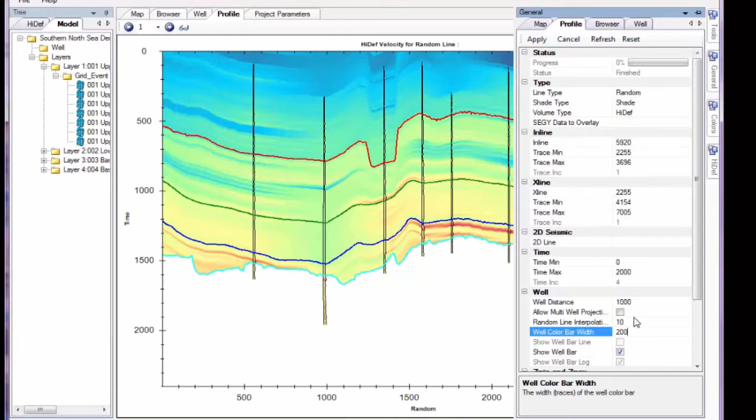And there it is. I'll change the scale of the display, change the well colour width bar to emphasize it. And there we have the perfect display, going through all the relevant wells in the project.

All these features so far have been designed as QC tools for you to get the best possible high definition velocity from your data. Once you are happy with what the displays are showing you, the entire volume can be processed. It is easy to set up, but it will take a while to generate, so I won't do it now, but I will show you how. Go to the HiDef flyout and pin it out to hold it on the screen. In the 3D range, the output type is set to instantaneous, and that's the type of SEG-Y velocity I want to generate. Check that the output SEG-Y directory is set, and the name is set to instantaneous SEG-Y as your output file.

The Run 3D tab allows a user to specify how many local CPUs are used for the velocity volume generation to maximize throughput on your machine. In this case, there are 8 processors on my computer, and I have set the number of tasks to be 8, so that all 8 CPUs on my computer will be used in batch mode to create the velocity volume that I want. Pressing apply will set the volume generation running, but as I said, I won't run it now because it does take some time to process.

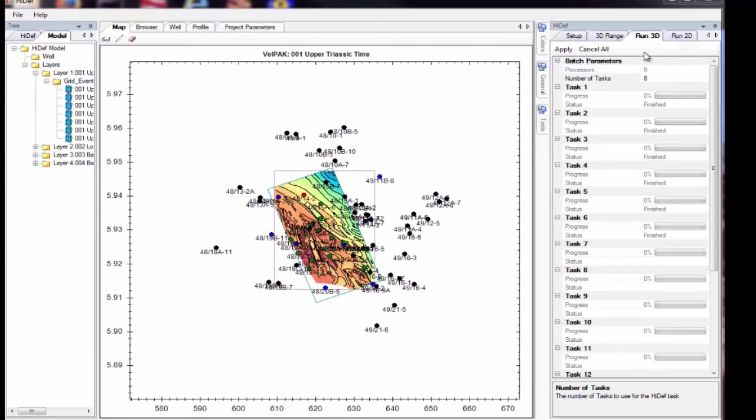So as you can see, it is very easy to generate the HiDef volume and intuitive for geologists to easily add knowledge to the procedure. The resultant velocity volume generated is useful for depth conversions, petrophysical characterization and pore pressure prediction workflows, but the depth conversion of surfaces can also be done directly within HiDef.

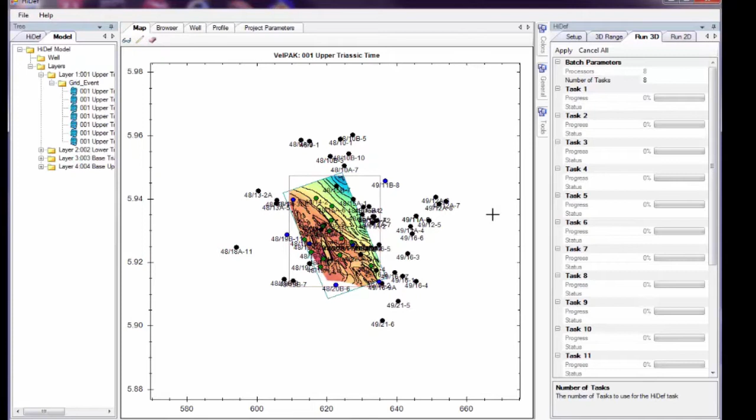And an interesting way to analyse the volume you have just produced is to use it to depth convert your VelPAK surfaces you read into HiDef when you started the project. You can then look at the difference between the depth grids generated in VelPAK versus the depth grids produced in HiDef from the newly generated SEG-Y volume. So, to make depth grids or a number of other types of grids from the newly created SEG-Y file, we go to the Tools flyout.

And the Make Grids tab. Here are the selection of grids that will be generated. If you don't want them all to be generated, just uncheck the box. Grids will be generated using the same AOI as the original VelPAK grids, and the kriging range is set per layer. Keeping the Apply Error box checked will mean the error will be applied per layer when grids are being generated.

Finally, you need to select the input SEG-Y file name, which is what we have just generated, the instantaneous SEG-Y. Clicking Apply when ready will start the process of generating all the grids you have requested. When the process is complete, the grids will be available in the HiDef project tree.

Here are all the grids that have been generated within HiDef. Closing the flyout and zooming in to the map, I'm going to select the depth for the first layer, and there we have on display the depth converted grid for the first layer within HiDef.

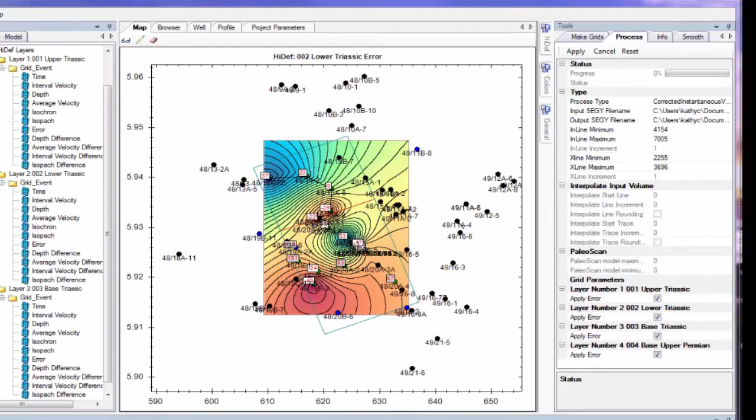When the volume has finished generating, you can look at it within the profile using your random line that you've already produced on your map by going into the General tab and making sure that your line type is set to random. Specify the volume type as one that is produced by HiDef as opposed to the background model, and then select which velocity volume you want to look at. In this case, it'll be the corrected instantaneous velocity you've just generated.

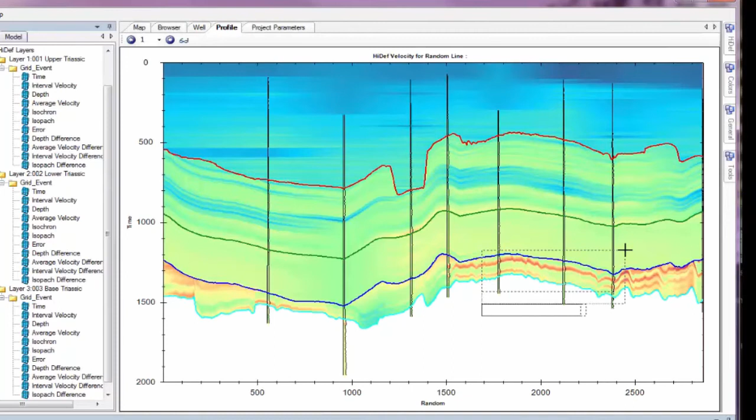Zooming in on an area of this random profile near one of the wells, you can see how very well the profiles tie with the wells now that the instantaneous velocity has been corrected using the error grids that were generated. Once you have QC'd your new volume in profile mode, you can redo the depth grids within HiDef.

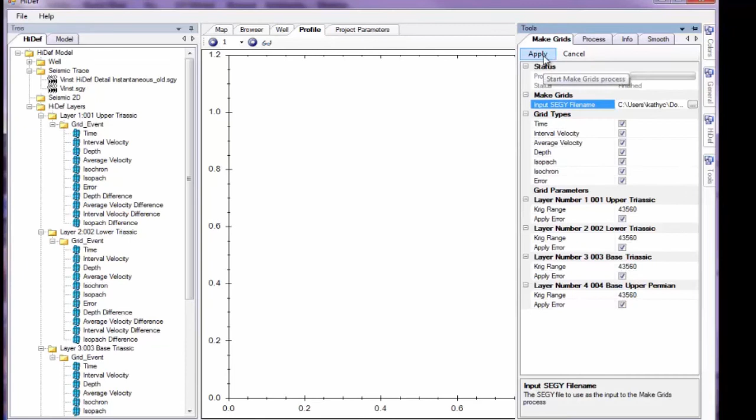Go to the Tools menu, Make Grids, and everything has been set up as it was. So press apply and the new grids will be made. Note the difference grids here. These show the difference between the HiDef generated grid and the original VelPAK generated grid.

So if we click on the depth difference, it shows the difference at each point between the original VelPAK grid and the HiDef. You can immediately see that there might be some discrepancy here that needs looking at because there's a bullseye hovering over a well.

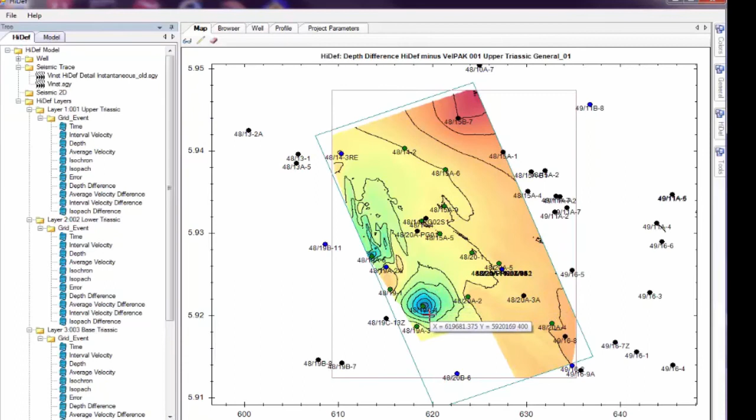So in HiDef so far we have made an instantaneous velocity volume. We have produced depth grids from them which have produced error grids. We have from those error grids tweaked the instantaneous velocity volume to make a corrected instantaneous volume, which we are more than happy ties the wells.

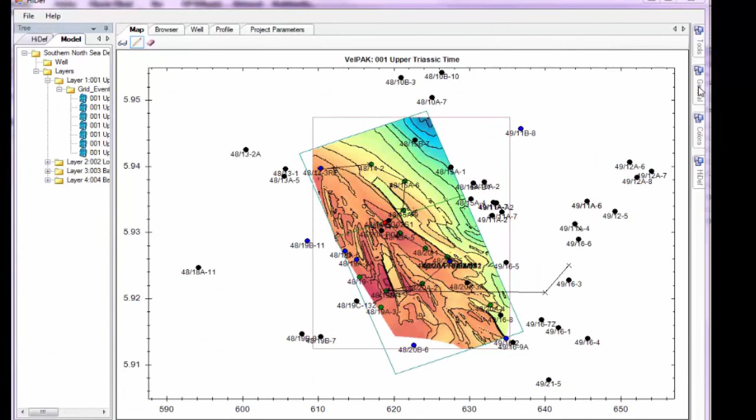And now the only thing that remains for the HiDef process to be complete is to turn the corrected instantaneous velocity volume into an average velocity so that it can be read into Kingdom. This once again is done in the Tools option by changing the process type to instantaneous to average. Select the output name, which will be, as you see, called instantaneous to average, and then pressing apply will produce the velocity volume that is needed to read into Kingdom.